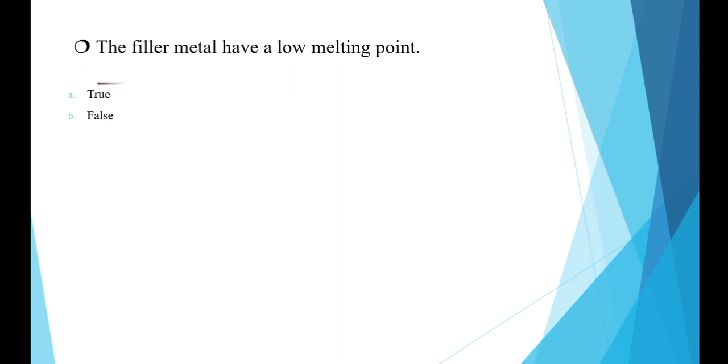In this video, I will cover the soldering questions of computer hardware and networking. Earlier in part 1, I covered the questions related to the tool topic. So without wasting our time, let's start our video, and our first question is: the filler metal has a low melting point. Is it true or false? The right answer is true. The filler metal has a low melting point.

In this video, I have covered subjective type questions also, so that your knowledge increases, and multiple choice questions also, so that you can check your knowledge. Our second question is, what is solder? This is a subjective type question. The answer is, it is a metallic glue that holds the parts together and forms a connection that allows electrical current to flow. The next question is, what are the equipments and materials needed in soldering?

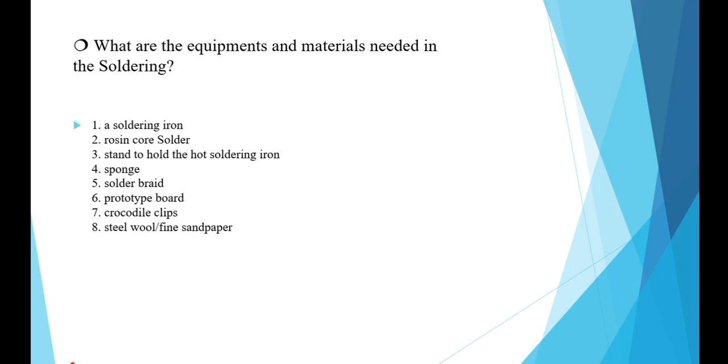There are 8 equipments, or you can say materials, needed in soldering. In the earlier video I have covered it, but again you can see: soldering iron, rosin core solder, stand to hold a hot soldering iron, sponge, solder braid, prototype board, crocodile clips, for which we have covered the question, and steel wool or fine sandpaper.

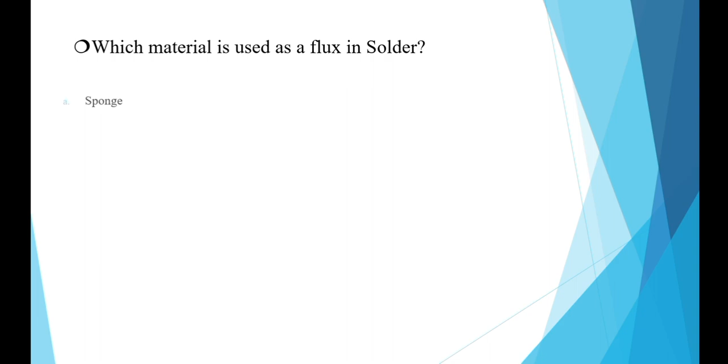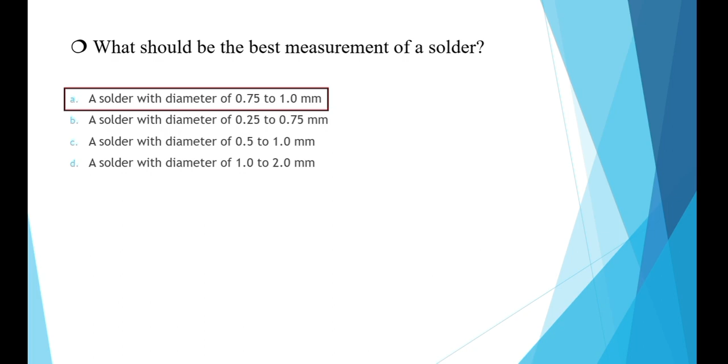Our next question is, which material is used as a flux in solder? The options are sponge, rosin core, solder braid, prototype board. The answer is rosin core. Our next question is, what should be the best measurement of a solder? The options are a solder with diameter of 0.75 to 1.0 mm, 0.25 to 0.75 mm, 0.5 to 1.0 mm, and 1.0 to 2.0 mm. The right answer is a solder with diameter of 0.75 to 1.0 mm.

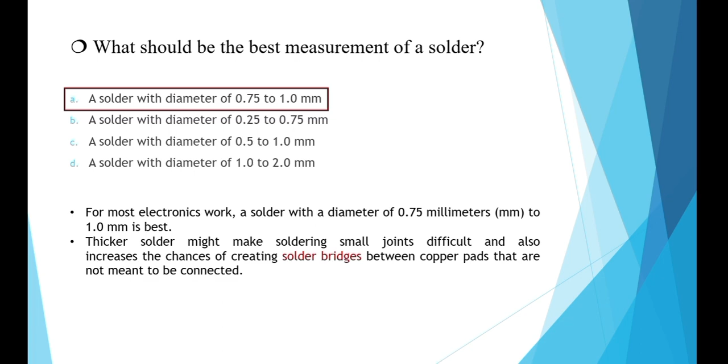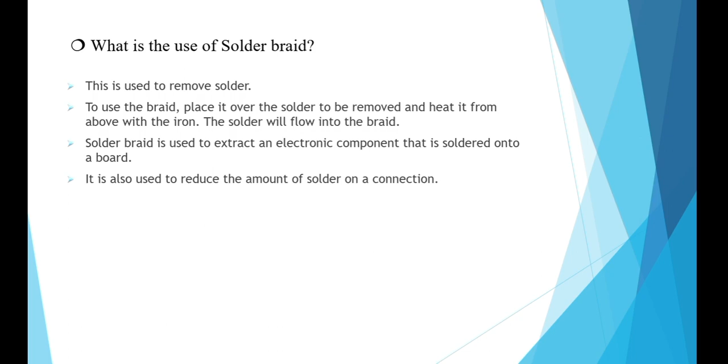For most electronics work, a solder with a diameter of 0.75 to 1.0 millimeters is best. Thicker solder might make soldering small joints difficult, and also increases the chances of creating solder bridges between copper pads that are not meant to be connected. What is the use of solder braid? It is used to remove solder. To use the braid, place it over the solder to be removed and heat it from above with the iron. The solder will flow into the braid. Solder braid is used to extract an electronic component soldered onto a board. It is also used to reduce the amount of solder on a connection.

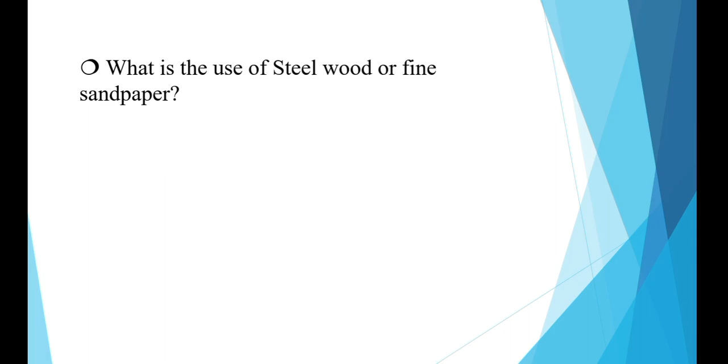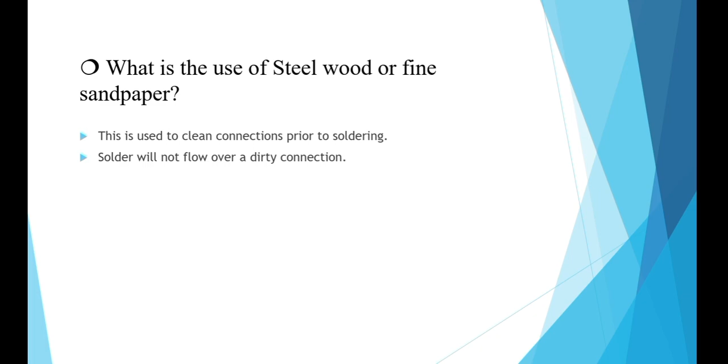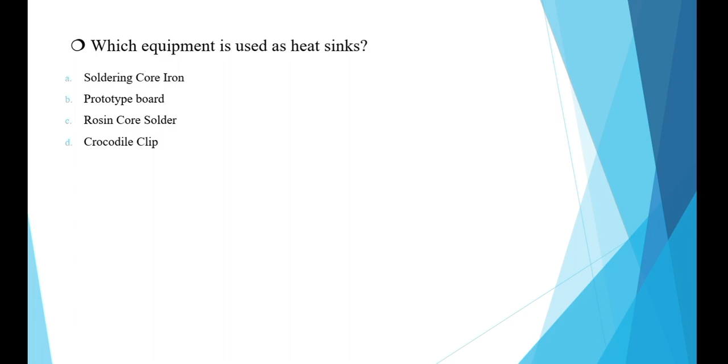Now there are some safety precautions you have to take while soldering. A soldering iron can heat to around 400 degrees centigrade, which can burn you or start a fire, so use it carefully. Unplug the iron when it is not in use. Keep the power cord away from spots where it can be tripped over. Take great care to avoid touching the tip of the soldering iron on a power line. If a power cord is touched by a hot iron, there is a serious risk of burns and electric shock. Always return the soldering iron to its stand when not in use. Never put it down on your workbench even for a moment.

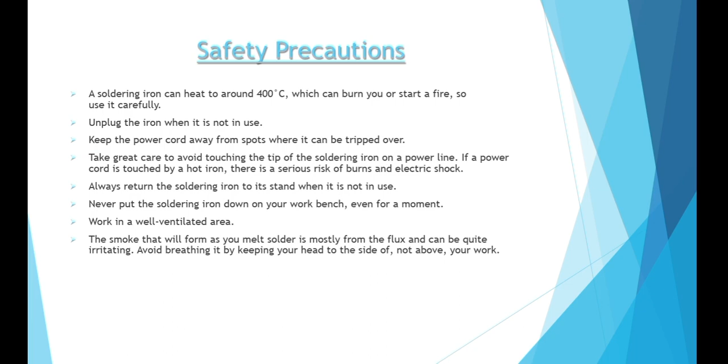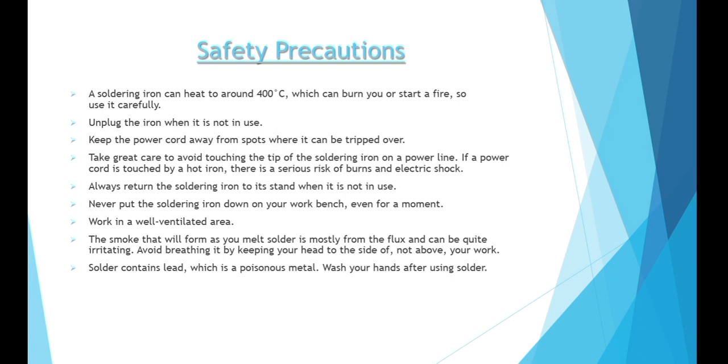Work in a well ventilated area. The smoke that forms as you melt solder is mostly from the flux and can be quite irritating. Avoid breathing it by keeping your head to the side of, not above, your work. Solder contains lead, which is a poisonous metal. Wash your hands after using solder.